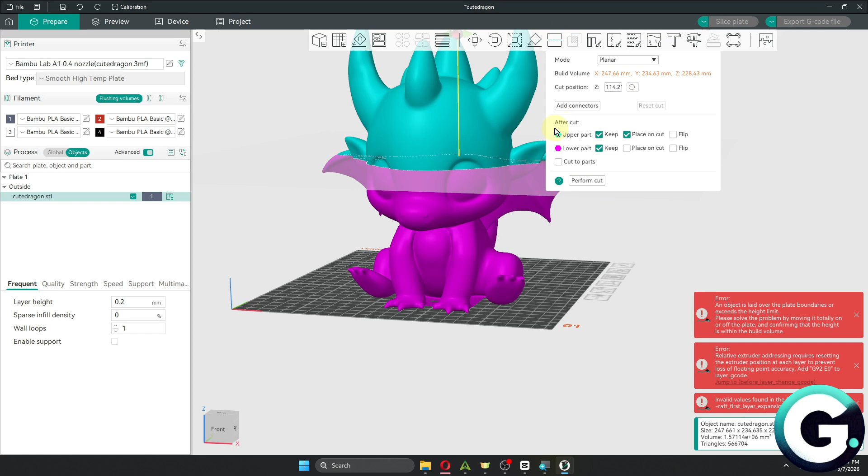You just want to press on it, or you can click on the cut function at the top of your properties. After clicking on cut, you can navigate or examine the properties. If you maybe want to cut them in the middle, you can just do so. But in my case, I'm going to be cutting my dragon into the bottom part and the head part. So I'm good with this one.

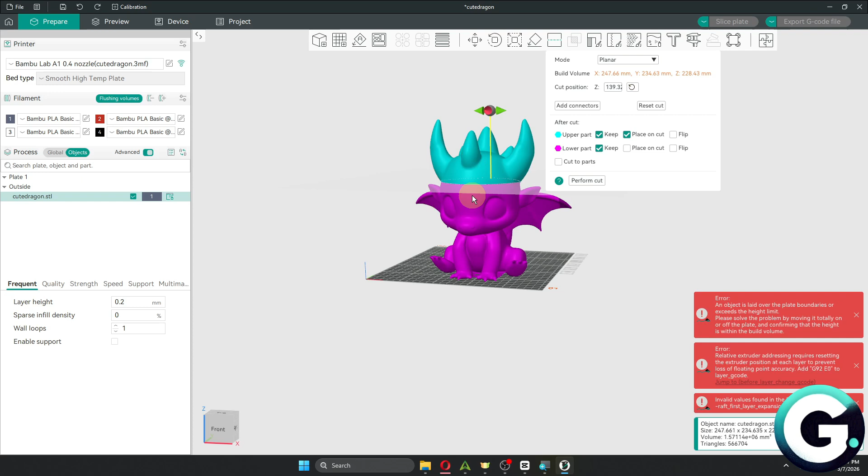And if you want to super glue them or add glue, it's totally fine. But if you want to make things easier, you can also add a connector onto your model or to your cut. Click on add connector. From here, you have multiple options to choose from. Basically, the best shape right here is going to be hexagon in most cases.

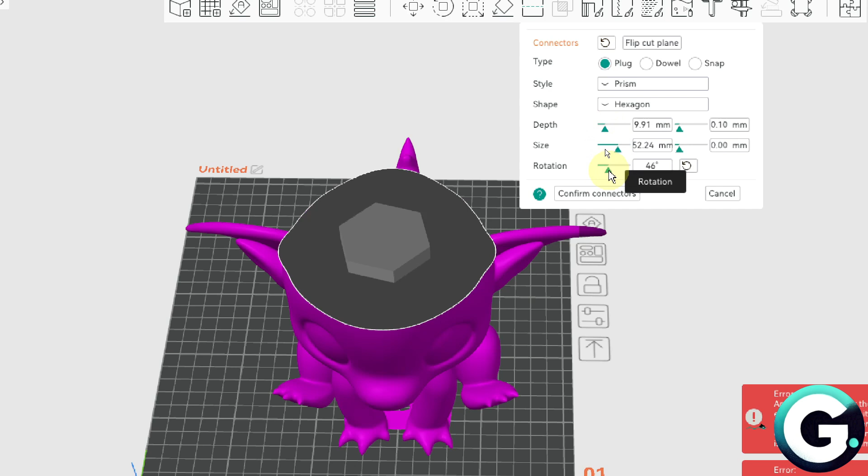Now to apply the connector, you want to click on any part of your cut. I'm going to be placing it on the middle one right here. And then I'm going to increase its depth, its size, and change something like the rotation. So to finalize the cut, just click on confirm cut or confirm connector, and then click perform cut.

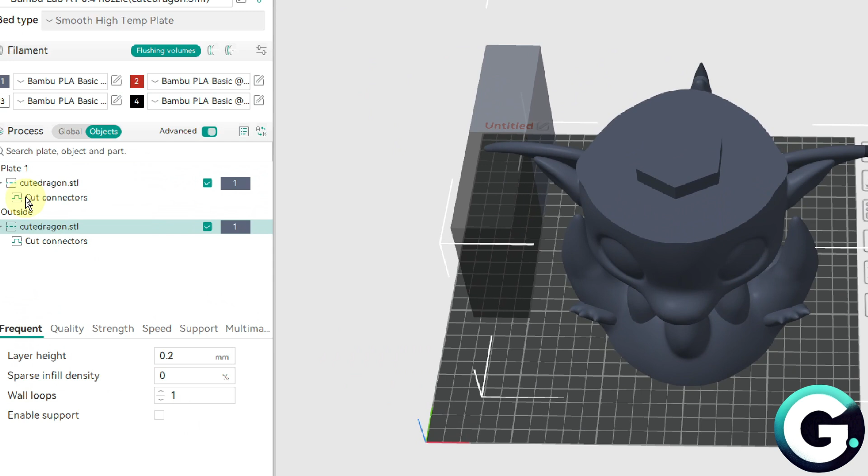From there, this will then split your model into two parts. Basically, we have the first cut and we have the second cut. With this, you will be able to see them in the objects category separately.

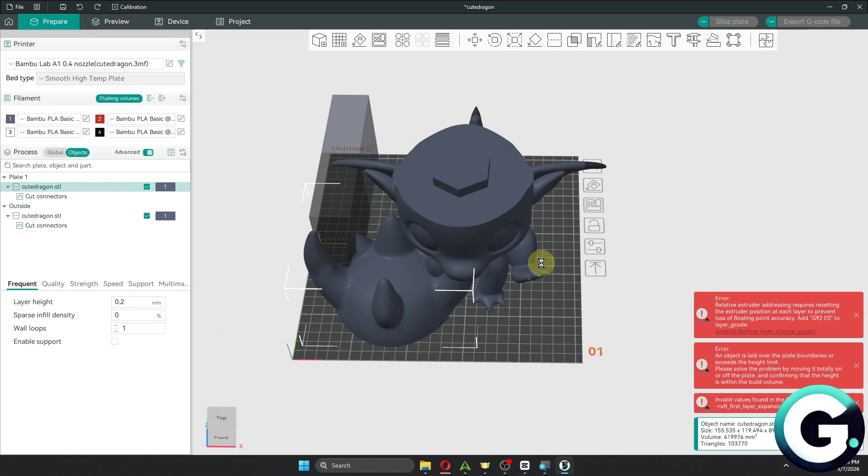So if you want to print the first part first, the first thing that you want to do is save the other part and then delete it from our plate. So let's save this specific part, which is the cute dragon head. Right click on it, click on export as one STL, and name this cute dragon part 2, because this is the part 2 of my print. Click on save, and now we can delete this specific part.

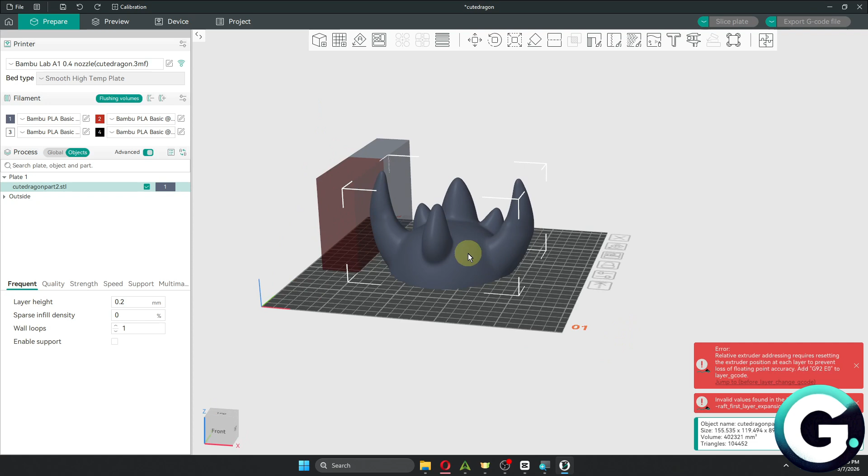The next thing that you want to do is print this part right here, and basically you are good to go. Right after that, you then delete this model, and we can import the part that we just saved, which is the cute dragon part 2. And basically from there, it will add the connector that we have placed and also the head itself. So just print this, and now you have two parts of the same model.

So you can just experiment with using these functions, but generally that's how you print them onto multiple parts.